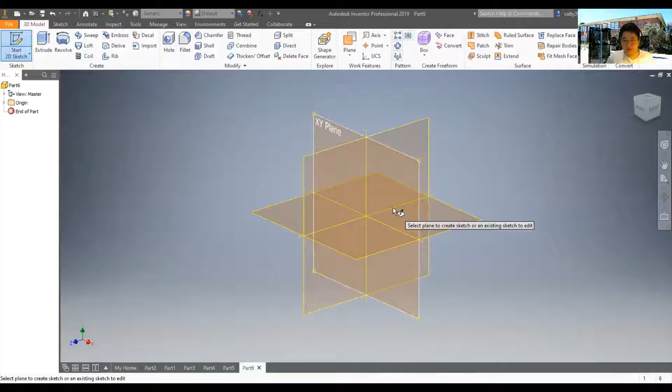Click on Part to start, and let's start our 2D sketch. Let's click the XY plane. Let's click on any rectangle, and let's set the dimension as 1 inches.

With that said, let's set this as 0.5. Now, since this is a little bit out of proportion, let's set this into something like 0.2 so that it's a little bit more thinner.

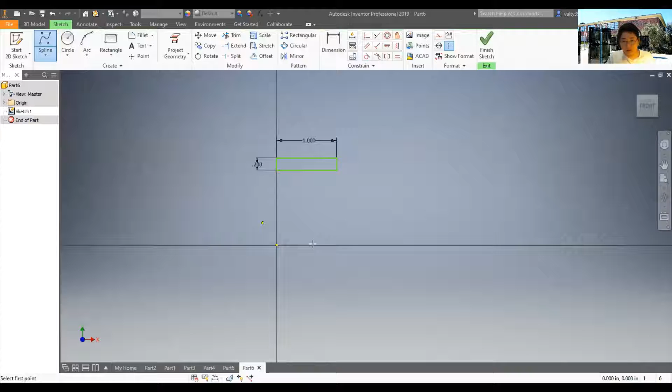Now that we have that done, let's use a complex tool called Spline Control Vertex. What you need to do is click on this point, a point over here in the outside, and just drag it down like that. And when you're done, make sure to press check mark.

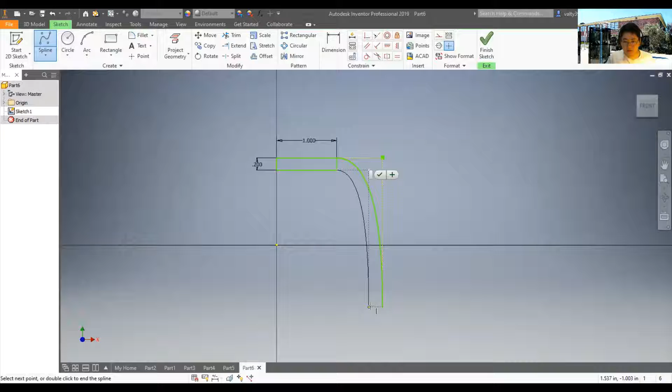The same with here. Click on over here, a point outside, and just drag it all the way down. And click on the check mark to finish. After you're done with that, click on to the line tool to connect those two.

Right-click to cancel. Now, the splines can vary among your designs, but one thing I do want to caution you is to make sure that this is parallel to the top. And make sure that this has at least 1 inch of clearance or something around 0.5 inches.

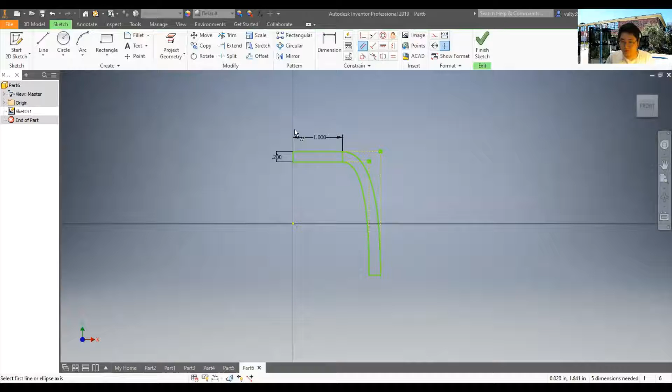Make sure that this whole structure is tall enough too. This must be around 4 inches. With that said, once you're done, click on Finish Sketch.

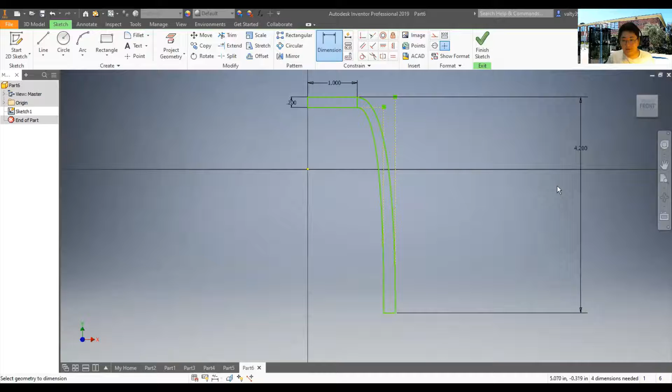However, just one more thing. Since our grip is 4 inches, but we have a 0.2 inch clearance, we actually want to do 4 plus 0.2. And there we go. Press Finish Sketch to finish, and let's extrude them.

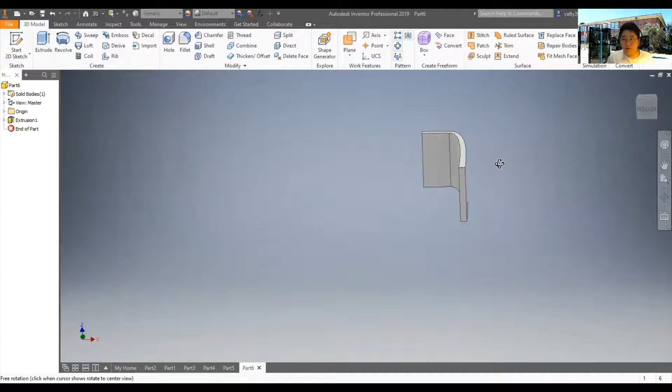There's multiple ways to extrude it, but let's just choose one way to do it, which is just do it horizontally. 2 inches should be perfectly fine. And let's click OK. Now, one thing you do have to keep in mind is to drill a hole over here.

We start our 2D sketch again over here, and all you have to do is create a hole that has 0.3 as its diameter.

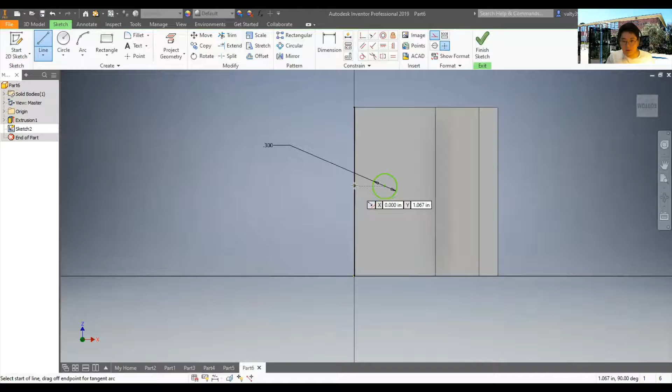Now, for design's sake, let's try to make things a little bit more cleaner by centering it like that. Usually, the circle would be somewhere else, but since this circle auto positioned to the center, all you have to do is click on this line and the center. And of course, for me, the sketch constraint already exists.

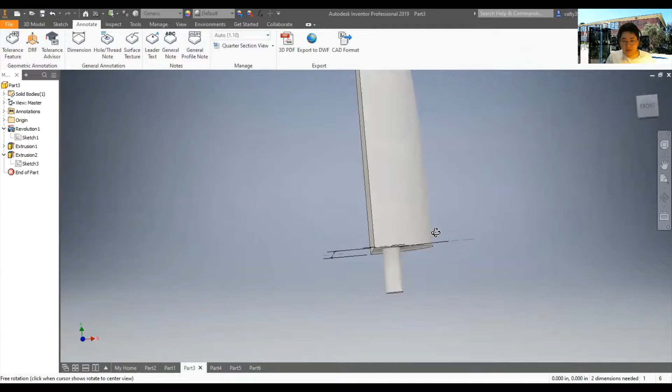Now, one thing to actually watch out for is the length. Let's check back on the top over here, this part. From here to there, we have a clearance of 0.25, which is where the hole will go in. So we gotta make sure that this line is 0.25 inches.

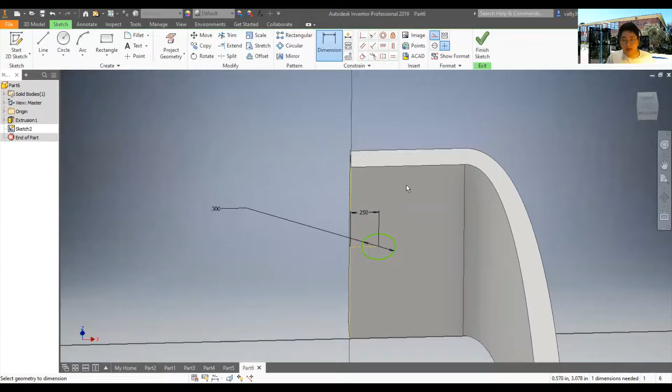After we've done that, click Finish Sketch, and all you have to do is just create a pin of 0.5 inches. Once you have that, you're pretty much done.

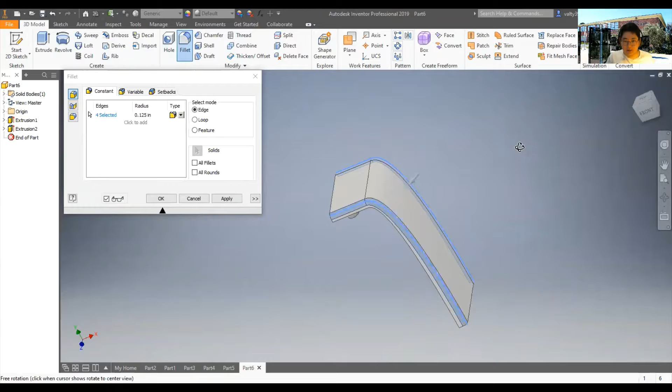Feel free to customize this design through things such as the fillet tool, which will let you customize it. Now, you can also fillet this a little bit more extremely and make this into a curved design as well.

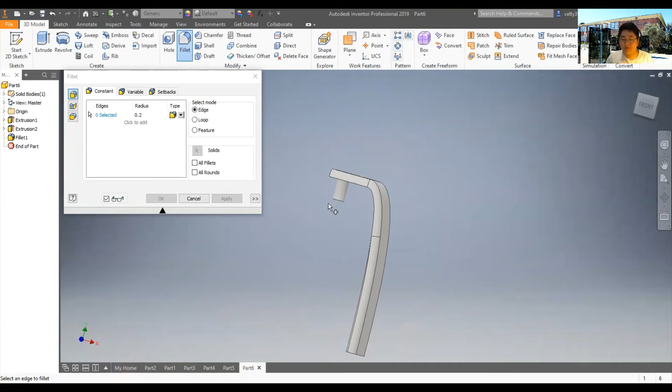So please try to spend some creative thoughts on modeling this design since it will be covering the hand. Try to think about ergonomic grips and how it can safely cover the hand. With that said, good luck with modeling.